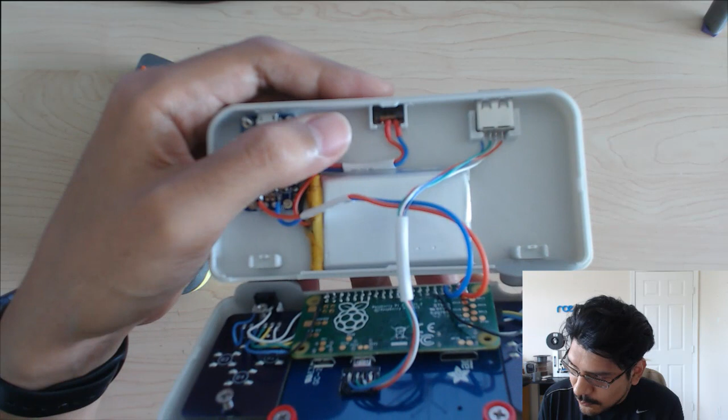So this is the PiGRRL Zero case, and here I only expose the switch, just the little switch piece, not the entire body of the switch, but the little actuator thing. The cool thing about it is that it's designed in a way where you cannot push this in. There's a little wall behind the component that prevents this thing from going in. You can see it here, there's just a little wall that keeps the switch in place.

So when you turn it on, you can't push it in because that little wall is holding it in place. And there's enough room to expose these wires and the little leads. So a really simple, straightforward thing to do, but I wanted to apply that to the PiGRRL 2 case. So that's what we're going to do.

We're going to take a look at CAD, and we're going to update the old case, not the old case, but just bring it back to the current. I'm also going to do a couple other different things too, which we'll talk about in a minute, but we'll see with time if we'll be able to get to it. So let's go ahead and take a look at some CAD.

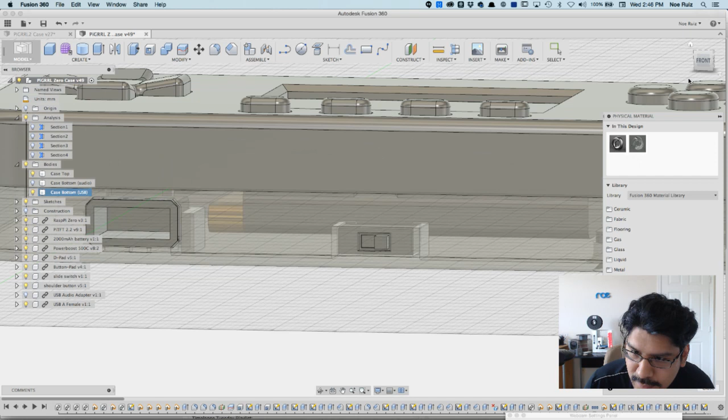Here we are in Fusion. Both enclosures were designed in Fusion. Let's take a look at the PiGRRL Zero first, just to get the look of it here. This is the case where the little switch is exposed, and if I do a quick material update, I can make this look like glass so you can see through the enclosure, so you can see that's where the case is. It's not fully exposed, the only thing that's exposed is the little actuator.

If I take the top off, if I had the top, see if I can get in there so you can see the rest of the geometry. I'll hide all the components real quick so you guys can see, just right click on all of them and shift select so I can hide everything. There we go. So that wall that I was talking about that keeps the switch in, this is pretty much the wall, just a couple of faces here, and then these little side walls also keep it from coming in. But there's a little bit of gap.

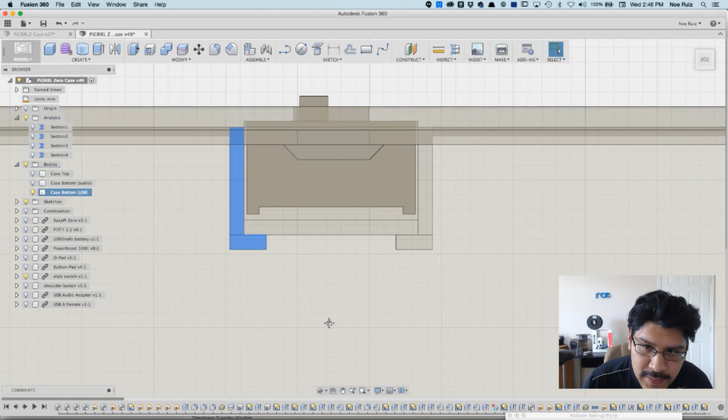So the gap there is in place because if this wall was fully extruded upwards, I wouldn't be able to get the actual slide switch in there. So if you insert it at an angle, which you kind of have to do, there's just enough leeway for the switch to kind of snap fit in there. So that's sort of how that works.

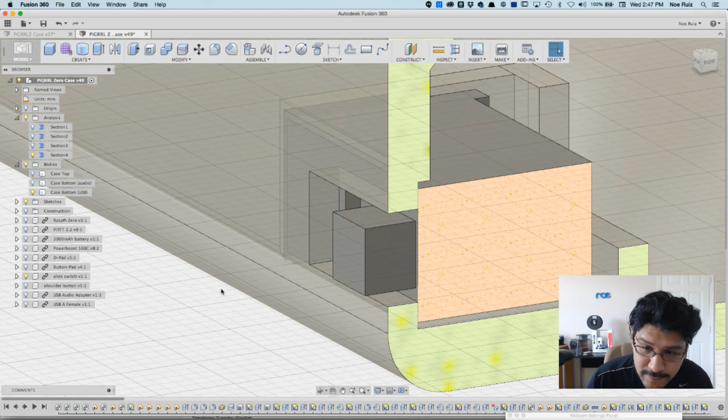And if we do a section analysis on it, we can see how it's right up against the wall of the enclosure here, and this is actually the opening of it. The whole case itself is about 1.5 millimeters thick, or 1.4, but it's been pushed in a little bit, so you can see that little overhang there. It's been pushed in by 1 millimeter, or 0.4 millimeters, so it makes this wall about 1 millimeter thick. So it's really right up against there.

And I could add a chamfer here, but I haven't done that, and I've already printed it out. The printer seems to be okay with it because it's not that big of a problem — it's not a large overhang.

So let me hide the slide switch real quick so you can see how it sort of gets nested into the face of it. And that's pretty much it.

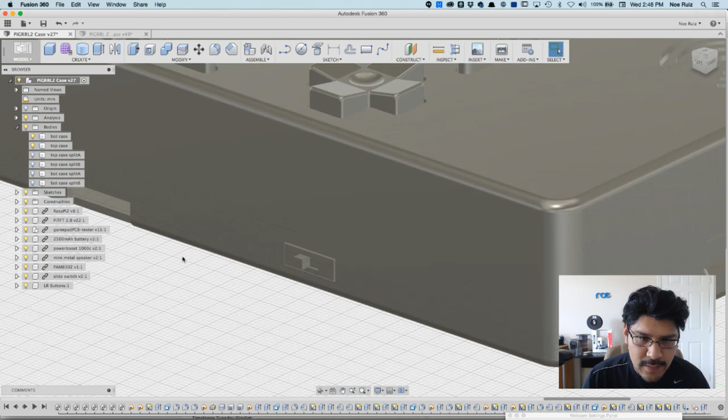So to apply this, you kind of have to draw some new things, but I can leverage some of the sketches I've already done, because all the cuts and extrudes here are actually derived from sketches. So the cool thing about Fusion is you can update sketches and modify existing features, because I have a timeline here at the bottom. Every one of these things at the bottom are features.

So let me hide the switch real quick, or let me do the same thing where I can click and hold down shift to show and hide multiple items, and then I'll hide the top case. All right, so now all that's left, let me hide that one too. Now what's left is the switch in the case.

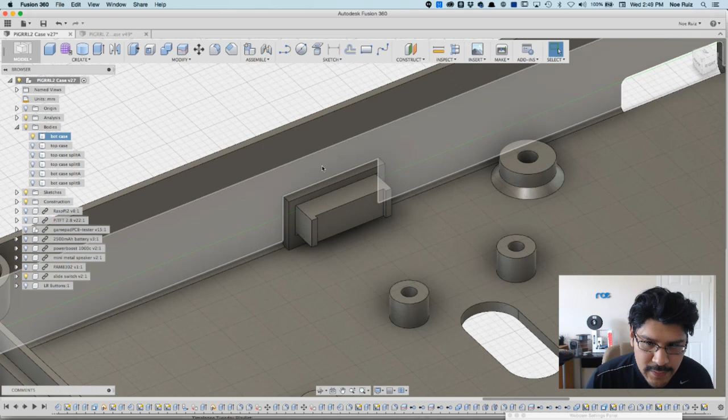So you can see the case here for the PiGRRL 2. There is not much there — there's no clips, nothing really preventing the switch from being pushed inside the case, which is what the problem is. So we'll update that and clean up a couple of things here.

So if I hide the switch and click on this face here, it'll highlight something in the timeline. These little 3 bars here, those icons indicate, hey, this is where that spot is. So if I double click on this, you can edit the feature. So the distance, it's actually a 2-sided direction extrude, and the operation is join.

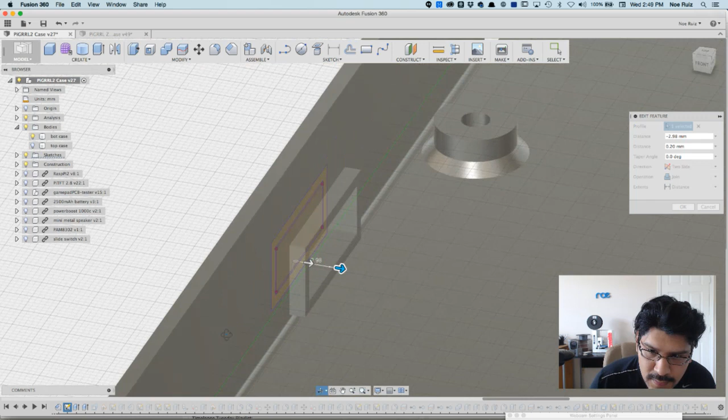And that's actually creating this little lip here, which I don't actually need. So I'm going to delete that — this one right here.

Actually, if you don't want to delete, you could suppress it. So if you right click on a feature, you can hit suppress feature, and I'll just disable it so that it doesn't affect it.

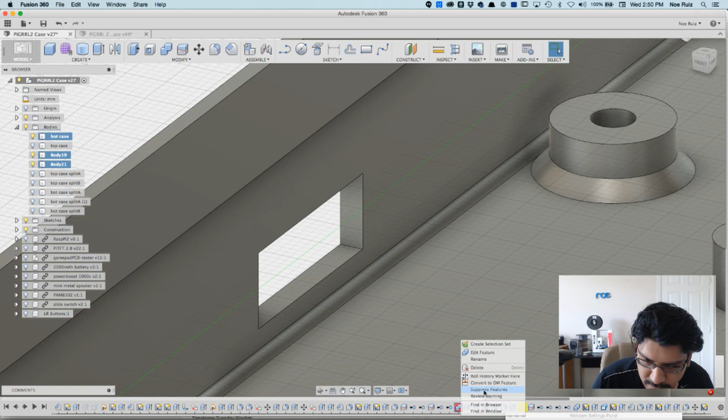And then we get a couple warnings here. It's saying, hey, there are a couple things that are dependent on that feature. So now these other features are like, hey, this isn't working. So there's a chamfer, for example, so I can suppress or delete those if I want. I'll just suppress them for now and see whether or not I want to delete them. There's a combine, which I need to suppress — I'm not even sure what it's doing, but I know it has to do something with that geometry, so that's why I'm suppressing it. And I think that's about it.

So I just have this big hole now. If we bring the switch back, you can see it's still there.

Okay, so the next thing I'm going to do, now that I got rid of that specific feature, let me hide this switch again, click on this face, one of these faces again, and I should see something in my timeline that tells me — so this right here, let me double click on that, see what it's doing. Okay, so this is where it's actually making that hole.

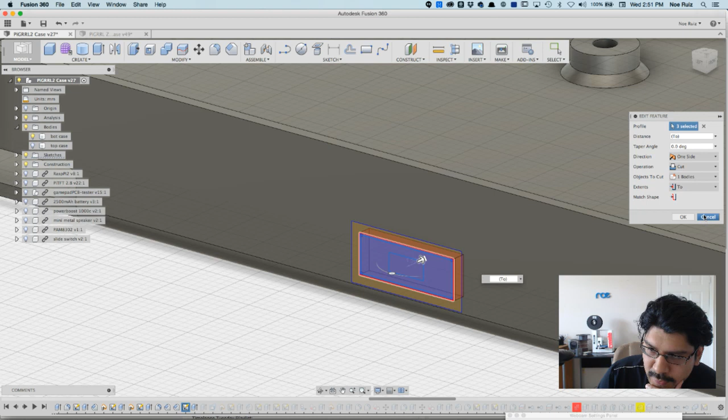So what I want to do is leverage this sketch. This is a sketch that I drew when I imported all the components — I projected sketches of those components so I can create those openings for the components on the case itself. So what I'll do is go into my sketches folder right here. And a really important thing to do, guys: if you draw a lot of sketches, be sure to name them.

I know I'm bad about not naming things sometimes, but with this project, as I got more features and sketches, I knew it was important to name them. So I can come in here and know exactly which one is which. Well, I can pretend to know. This one is called switch hole. I'll open it here and show it by clicking the little light bulb icon, kind of like on and off.

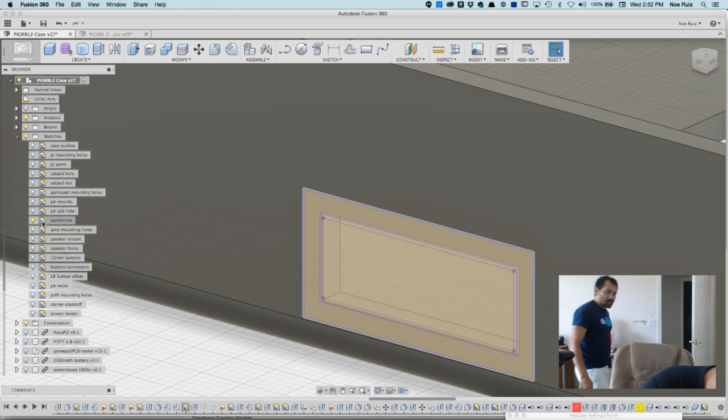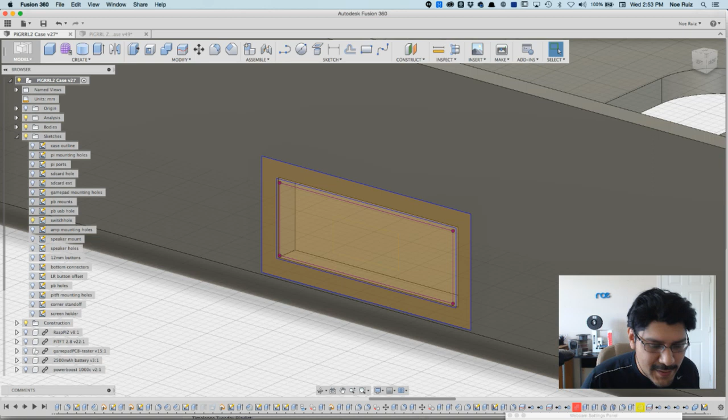So what I have here is that switch hole, and if I double click on that sketch, I can see I'm in the environment for editing it, since you can't edit it outside of the sketch environment. What I'll do now is reveal it, show the switch again, and this is where I'll draw the hole for the actual actuator, the little switch dolly. This whole thing is the switch body, and I'll call this the actuator. So what I could do is project a sketch of this specific face here.

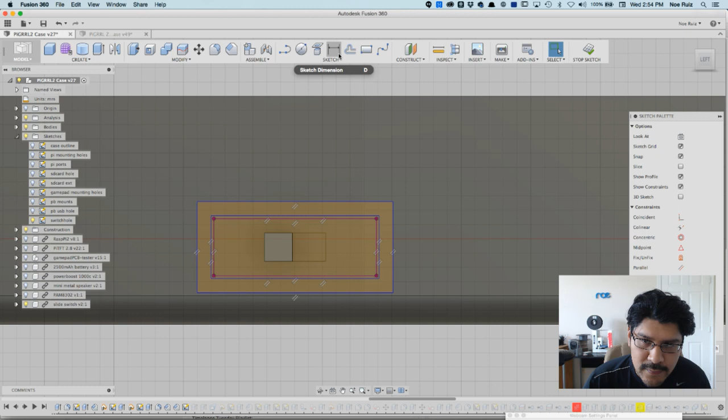What I think we can do is go over to sketch, click on project include, and P. If you click on P on your keyboard, that's the little shortcut. Right now it's a little tricky, so I should probably hide all the bodies. Now I have a bit more ability to click on the right face I want. It looks like it's not selecting the specific face I want, so I might have to just draw on top of it. Let me click on a couple things here.

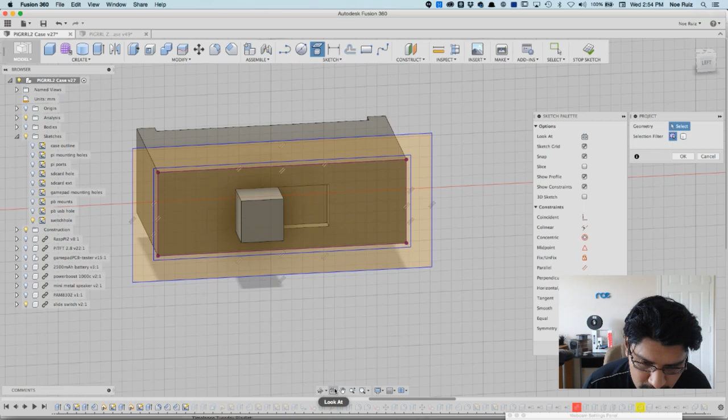By orbiting it's acting all weird, so one thing to fix that, I think, is to click on 'look at.' That lets you look at a specific thing, so now when I revolve around it, it's good there. So that's look at, you click on a face and it'll revolve around that face, because the default is kind of annoying. Now I don't think I can still project anything. I can't select that, I can't select this. Let me see if I can go inside this switch. Go to bodies - nope, it's just one body.

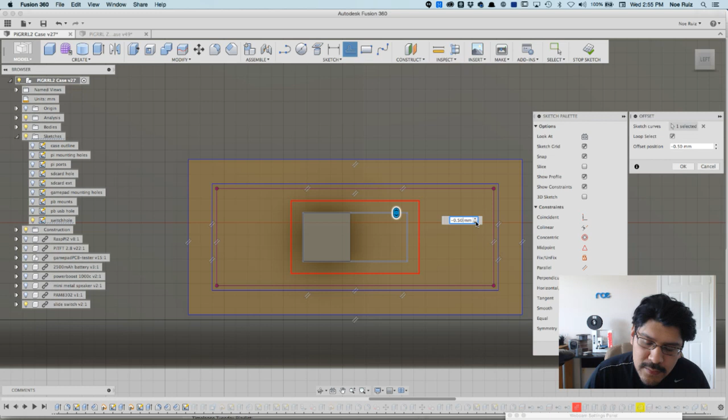So I might want to not project it, but just draw on top of it instead. I really want to be able to see that. I can sort of see something there, I can sort of see a project - yeah, I guess it's already projected. You see how I can select that? If I click on outline, I wonder if I can select it. Yeah, I can select that guy, and that will offset it. What I want is pretty close - the offset position is going to be negative 0.5 millimeters, half a millimeter. I'll hit OK, and that's basically exactly how I've done this guy in PiGRRL Zero.

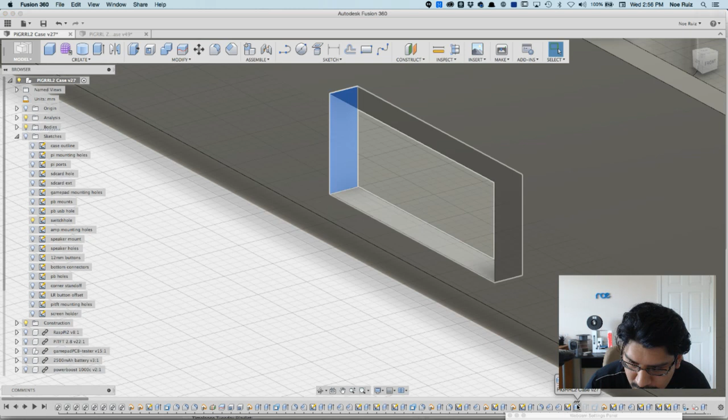I'll hit stop sketch, since that's all the modifications I want to make, and that will save the feature. Now it goes back to this thing. So what I'll do now is hide this real quick, the little slide switch component, and I still have it open here in the sketches panel. I already forgot which feature in the timeline it is, so I'll select one of these faces - I'll probably have to hide the sketches real quick. And there it is, that's the guy, there's the culprit. I have it highlighted, and I'll double click on it.

I'm just going to edit this existing thing. So when I double click on that feature, I can see the profile here - this is all the little sketches associated with that extrude. So I'm going to click X, then I'll bring back the sketches, and then I'll click on these two guys.

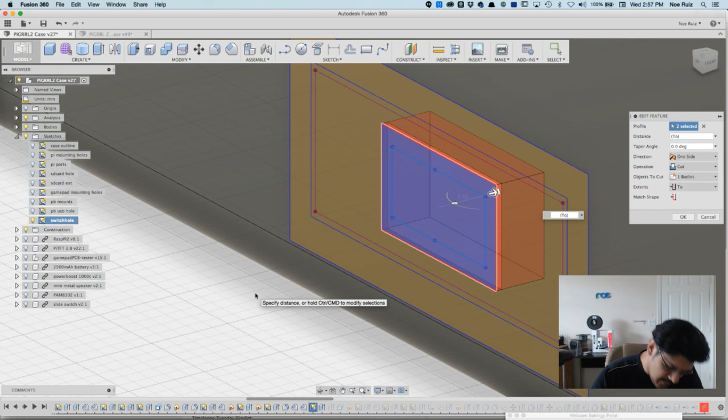Did I click on that? Let me hold down Command or Control on a PC to select multiple profiles or features in the sketch. If I toggle that key, it'll show you what it's doing. So that's pretty much what I want, so I'll hit OK.

Fusion's going to think about what it's doing, and then it'll do it. Now I have my updated hole. So again, I'll reveal the switch, and you can see it's already, because it's in that position, coming outside the case.

So I need to update the switch positioning of the switch. So the next thing I need to do is figure out where in the timeline I made a snapshot

of the components. When you're importing and dealing with components, as you move them around, you have the option to save the position as a state in your timeline. They're indicated like this - here's one, here's another one. I've done it quite a few different times, so I have to figure out where in the timeline I last updated those.

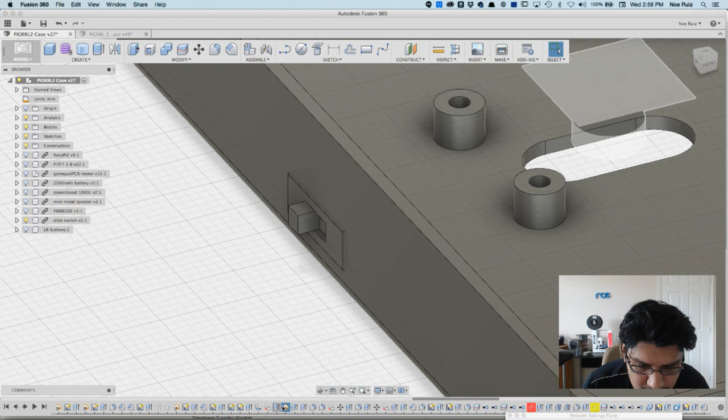So I'll probably just go to the most recent one, the one closest to the end of the timeline, because that's where I left off. The end being over here, far to the right, and the beginning all the way to the left. So just by looking at it, I'm thinking it's this guy over here, this little guy there.

What I'll do next is double click on that, and it'll change a couple of things here. Now I have these two new icons at the top - it says finish capture and cancel position. When I move any of the components, it'll let me finish the capture, which will accept the position edit, and depending on how I moved it, it may update some sketches, like if anything was projected from that component.

So what I want to do is move it in a way where it's kind of similar to the PiGRRL Zero. You can see here it's kind of floating, a little floating there. There's plenty of room here, and I don't want that, because if I look at the PiGRRL Zero, it's not really floating at all - it's flat with the surface of the bottom of the enclosure.

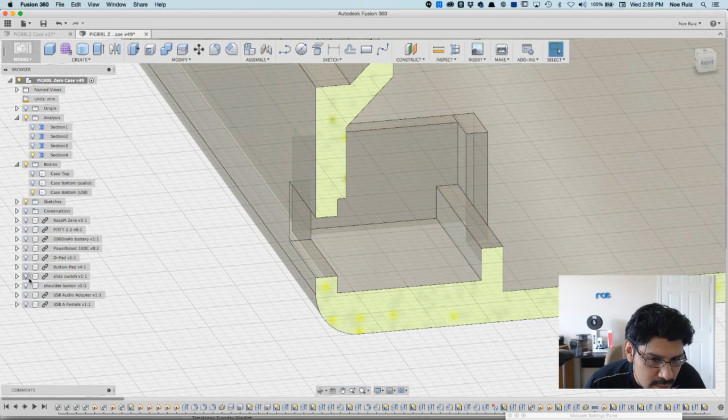So let me bring that back. Yeah, you can see it's a little bit floating, tiny bit. Looks like there's a wall there and stuff. So I could probably just extrude a little platform for it so that there's something for it to rest on.

So I might move it down a little bit just so it's not so floaty up there. And looking at it, there's no problem with it being lower to the enclosure, because there's nothing going underneath it. I'm just thinking out loud so you guys can hear the process of like, all right, well,

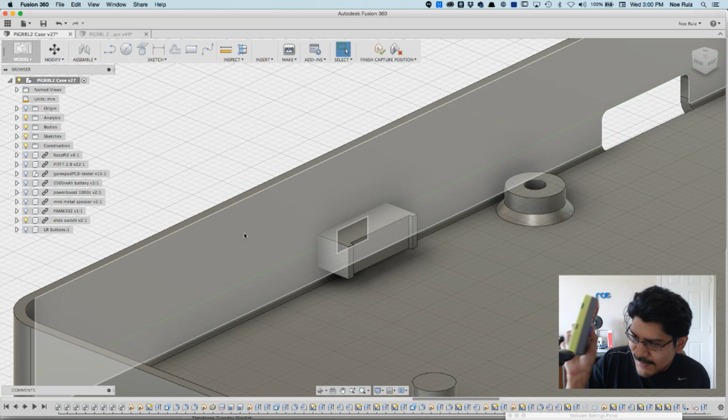I'm here, so where's a good spot for it? It's in a good spot where my fingers don't get in the way of it, and because it's recessed into the case... oh man, I'm starting to lose it in there. I'm just looking at it here, making sure it's in a good spot and whatnot.

So what I'll do is hit the modify button over here, move, and then select this guy here. Now I can move it down a bit. My hopes are that I'll be able to hit finish capture, and then the extrude that we did will update. So what I need to do is actually push it back a little bit this way.

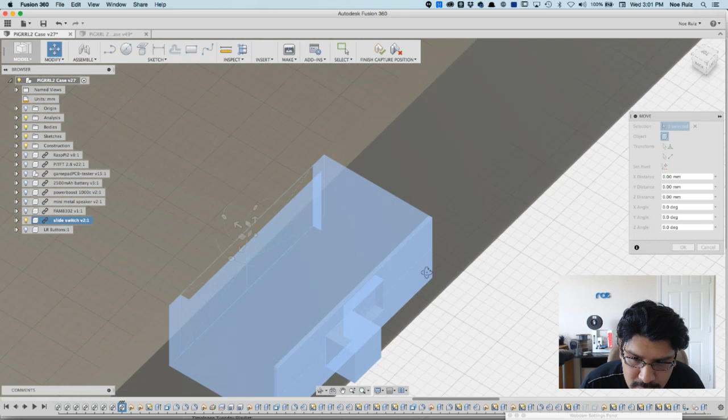So I want to be as flush with the case as I can, but I'm not sure how exact I can get it. There's a button up here - this is align, and you can align something to that, but I'm not sure if I'll be able to align it perfectly where I want. So for now, I'm just going to try to move it in sub-millimeters here.

Let's see if I can. So like 0.2 is right there, that's pretty flush with it. But I need to push it back 1 millimeter, so I'm going to just type in 1 here in the little Y distance floaty box. And then that will give me a good spot here, so now I'm 1 millimeter from that.

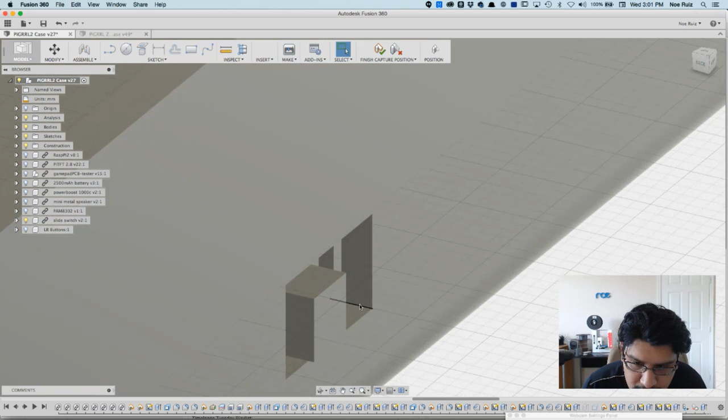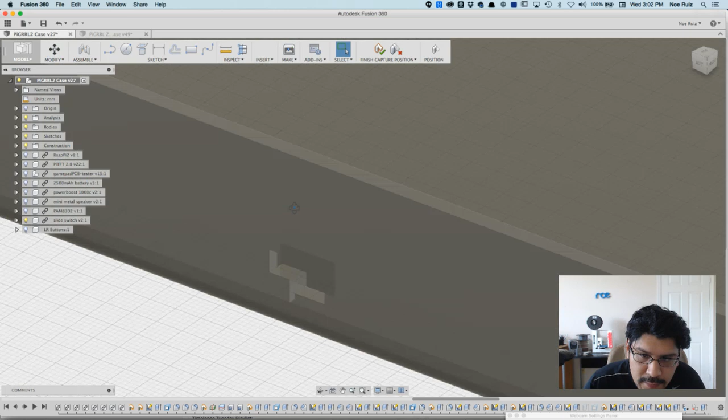So let's go ahead and hit - oh yeah, I wanted to move it down a little bit too, right? So let's just hit the move again. When you hit the move button, you have a couple different places to snap your manipulator to, so depending on where you want to move it, you have the control to do that. I'm just gonna move it down by 1 millimeter so I have a little bit more clearance and stuff.

I'll hit OK. And you can see now that I'm not aligned with the thing anymore. So I'm gonna hit finish capture, and hopefully the stuff will update. It might not, because I think some of the edits, the extrude for example, was done before the position. So what I should have done is modify that position of the component right before any of that stuff happened - that's why none of these things got updated.

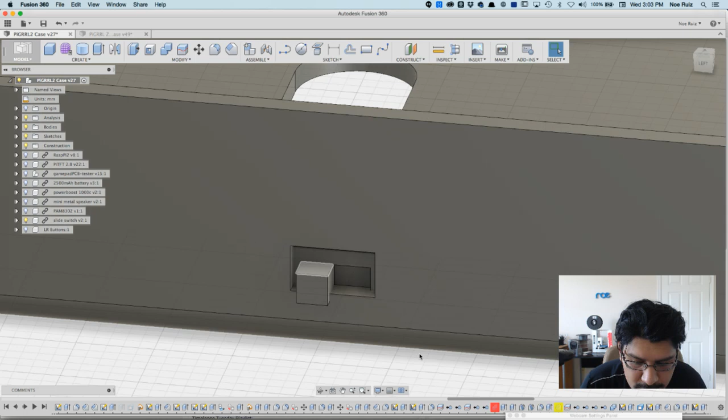So I need to kind of do that stuff again, but I need to find this guy - find it here, and let's see if I can. So it's right here, this is the thing here. So this right here, I should have modified this position. And you can of course move things around, but I'm fearful that something might - probably not though.

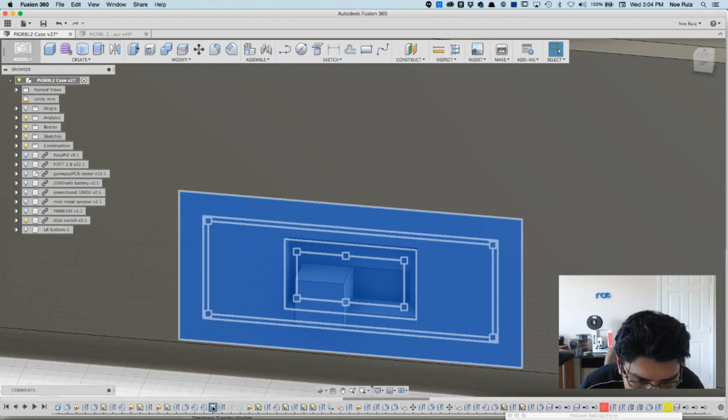Let's see, let's do this again. I can probably just move this feature past that. So I'm going to grab these two and then move it past this position 9, I guess. So let's see if we can do that. I'm going to click and then just drag it. And it's not letting me. So that would have been nice and easy, but it's not - it doesn't let me push it forward.

So what I have to do is - let me see, okay, so it's these guys. I'll have to modify this guy, so I'm gonna double click on this, and then you can see that's positioned over there. So I'm basically gonna redo the stuff here, but I remembered what I did. So what I can do is hit the modify, click on that - we pushed it back by 1.2 millimeters, and then we moved it down by 1 millimeter.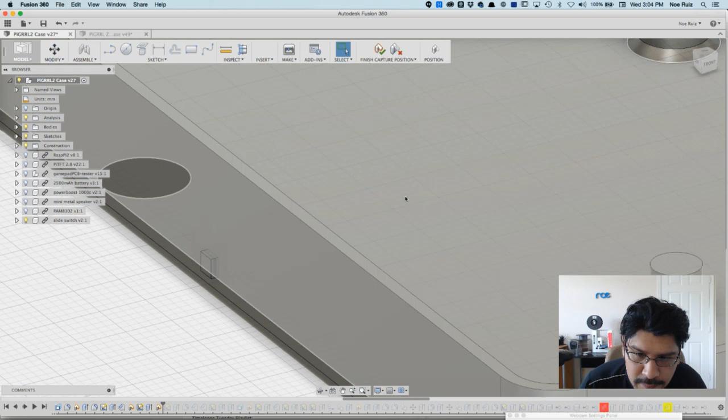This is all arbitrary, I mean it's up to you however you want to modify, but I think this is going to be a good update to it. And then I'll hit finish capture - hopefully the extrudes and everything get follow through that update.

And it really didn't - now I don't see any extrudes. Let's see where I am in the timeline. Am I just not there? No, I'm far back over there. So now I don't have those extrudes that I did. This is a good problem here because I'm not sure why some of these things didn't get updated.

And now I think I might be lost here a little bit. I think I could do Control Z, but I'm not too sure. These are some other features from before that were suppressed, and these are some other ones here. So let's see - let me hide this real quick. Yeah, it's gone.

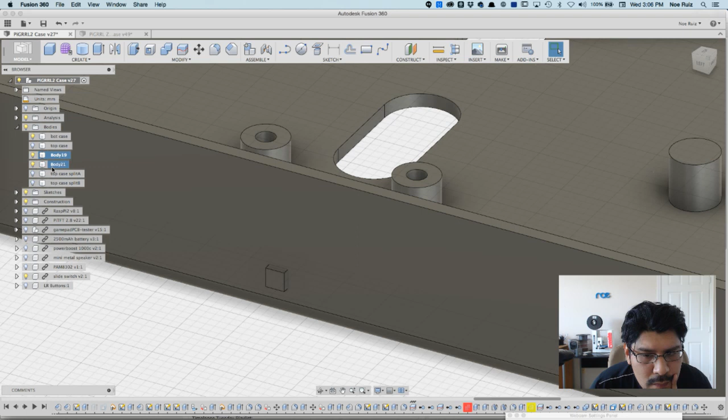What are these? Oh, okay, so a couple different things are happening here. I think these are those standoffs that didn't get merged, but we'll deal with that in a minute here. I really got to figure out why some of our features just sort of disappeared here. I keep thinking it's these, but it kind of looks like it - it might be these guys here. I'm not sure why they're suppressed. Let me unsuppress them, see what happens.

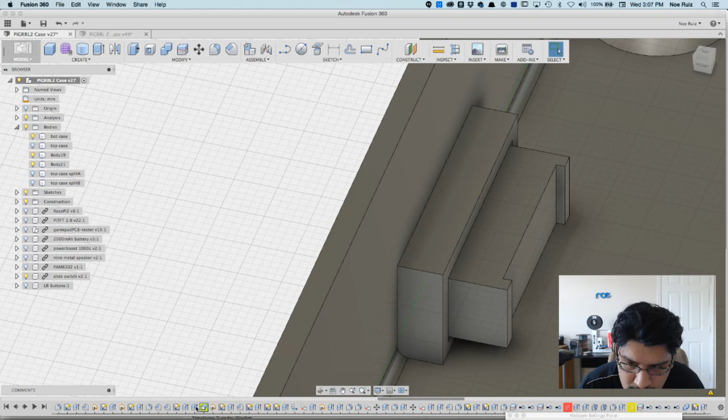Wow, so those were the other things that I didn't really want. Let me re-suppress that. So we got something there. So it is there, but...

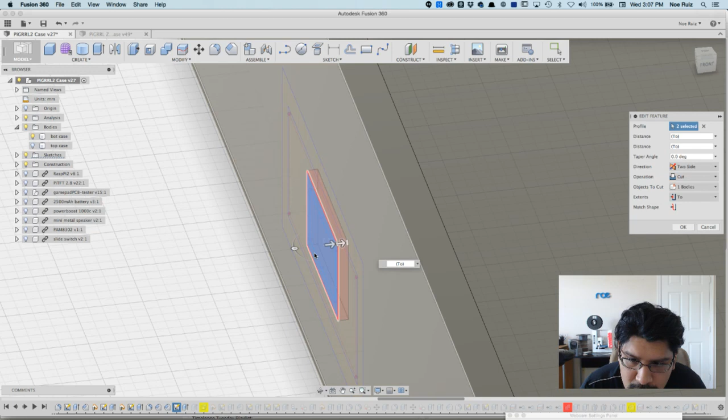Ah, I see, so it happened but it didn't update this side for whatever strange reason. Let me click on this guy. I just got confused, it felt like it didn't go there. So what I'll do is hit two side, bring this one out, and now that should do something here. So I'll hit OK. I think the positioning did update.

Oh man, I messed up again. I need to push it forward too. This guy needs to get pushed forward so it cuts through the whole thing. I would use a distance too, but because of where the component is, the sketch followed it.

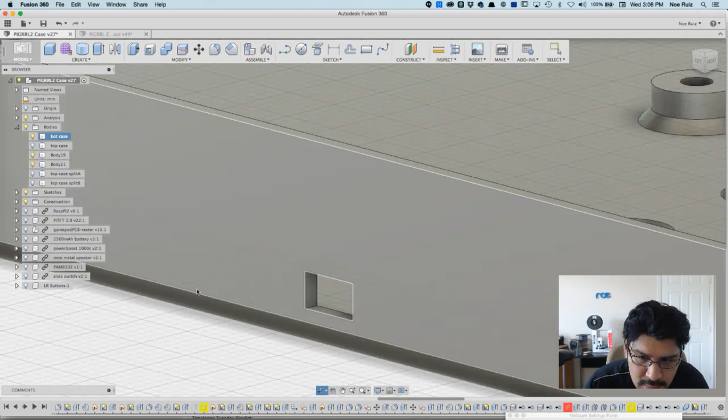So let me see, let me make sure that... yeah, it is right. So you can see here now that the new position of the slide switch has been updated, everything has been updated with it, and that includes the sketch. So the sketch is there, and I think that's good there.

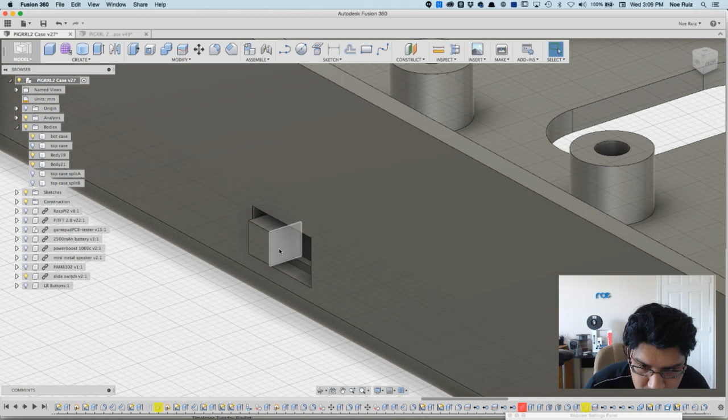Now the next thing I want to do is, you can see that I need to cut away some material here. So what I'm going to do is bring my timeline head, my positioning in the timeline, which is all the way over here. I'm actually going to bring it back to this spot here because I want to start modifying features in that spot so it's all in the same area.

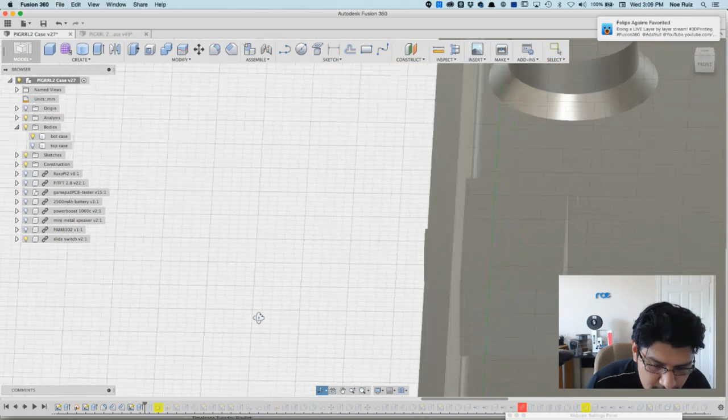So I wonder if I can, like, say, roll marker here. I think that'll bring it there. Awesome, I've never used that feature, but it's there and it seems to be okay. So now what I can do is start modifying new features, applying new features to this spot in time.

So what I'll do is I'll hide my body here, my case body, it's in the bodies folder, and I'll bring back the slide switch hole. You can see not all the sketches are there because at this point in time none of those sketches have been created yet. So you have to think about things like that. A little confusing, but hopefully you folks can follow along with it.

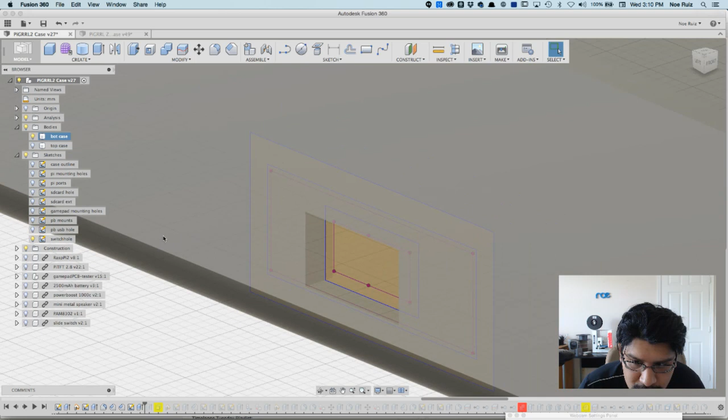So the next thing I'm going to do is hide the slide switch here, and I will bring back the bottom case because that's what we're working on. You can see it's inside there. So what I need to do is hide the body again, and these are basically the things I want to extrude out—these three here.

I'm going to hit E on my keyboard since I have them selected, and I'm going to start pulling this out like that. And now it's creating a new body, and that's because there's nothing here to interact with. So Fusion does its best job to say, hey, maybe you want a new body. But as soon as I make a body, it thinks that I want to cut, and that's basically what I want. So I'll hit OK, and that creates a new feature here at this point in time.

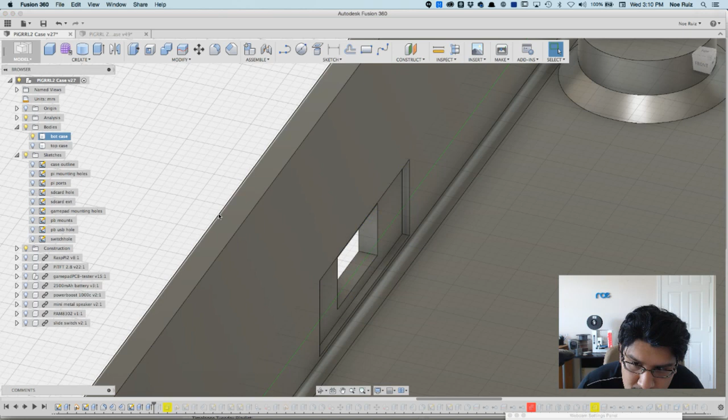I'll hide the sketch. And now hopefully this is 1 millimeter. It might not be. It's 1.02, which is pretty damn close, but whatever.

So if I bring back the switch, you can see now I have enough area for the switch to sort of feed inside of. So it's in there now. So all that material is cut away.

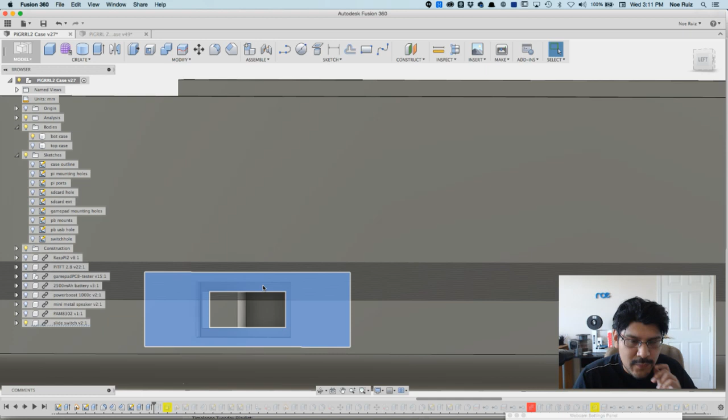And I also have a small offset too, about a 0.5 offset, so that the switch has a teeny bit of wiggle room to go in there. And this offset, of course, was 0.5, which is half a millimeter, which gives me a lot of leeway. And when you look at it, it actually looks a lot less. So it's always good to have a little bit more leeway, especially if you don't want something that's so sort of friction snap fit.

All right, so that's pretty much a good spot, good position. Updated that. Now I could probably go forward in time and start doing things, but I'm going to stay in this area, stay in this point in time, and start applying new things. So I actually need to make a new sketch so I can make this feature stuff.

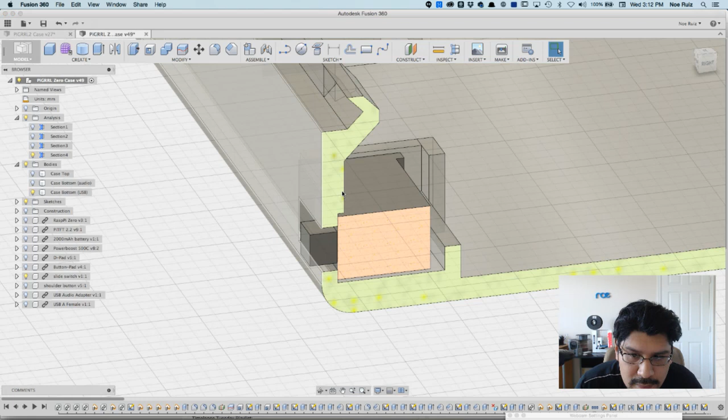Let me hide this so I can reference my drawing anyway. So if we look at, let me hide this—this is the PiGRRL Zero case, by the way, because you can see here in the tab, PiGRRL Zero. I have a sketch for it, and I think it's called switch holder. Yeah, switch holder is this guy. A little bit different than what I envisioned.

Switch holder, do I have any other switch things? I don't see anything else. Switch cut, that's the cutter.

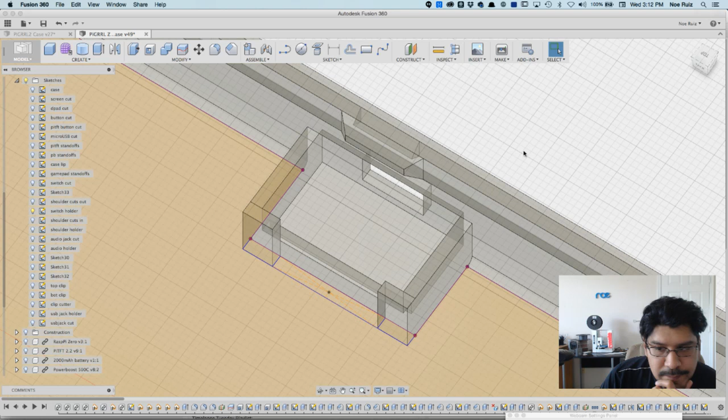I'm trying to figure out how did I make the sides. Might be clip holder? No, that's something else. Uh-oh, I'm a victim of not naming these, so I don't know what the heck they are. Shoulder holder, shoulder cuts, switch holder, what's sketch? Ah, so maybe it's this one. Sketch 33.

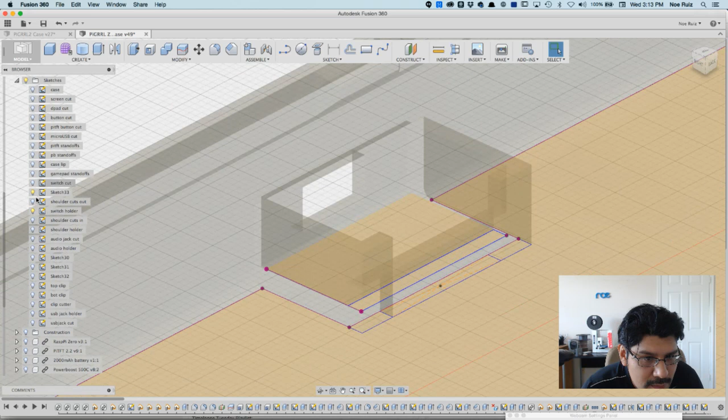These are shoulder cutouts. It's probably for the shoulder buttons. So something here made this. It could have been... I think this is for like the platform. This one's for like the...

I gotta make this a little bit simpler. Like I want to try to do all this with one sketch instead of making like 4, because I was experimenting with it while doing this, so this can be cleaned up and simplified a little bit. So we'll try to do that here when I draw a new sketch on top of it.

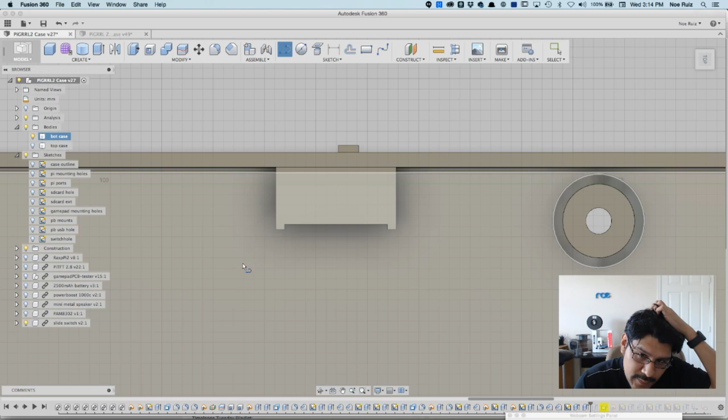So I'll make a new sketch, and you can do that by just playing with any of these sketch tools. You got a lot of different tools. So I'm going to start with the line tool, and I'm going to sketch right on top of this face here, which is the bottom inside of the case, and it'll project it. So it projected that whole bottom case, and I'm just going to start drawing from the top view down.

So the thickness of this thing is, I can reference this guy at least. I think it's like 1 millimeter thick, 1 millimeter all the way around. That too is 1 millimeter. The height of it is pretty much flush with the switch. Yeah.

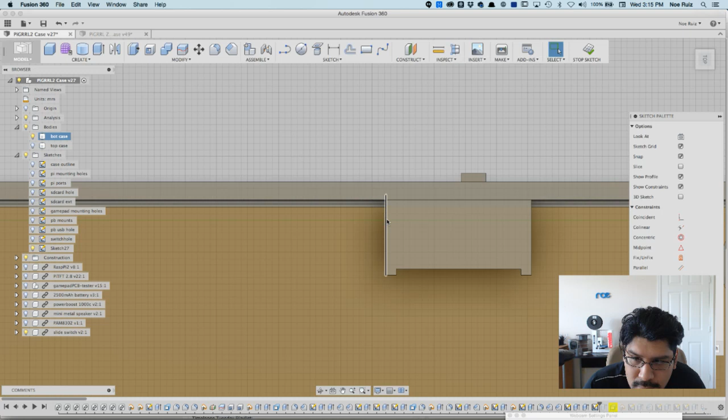So that's okay. So I will start drawing out a line here. And you can see when you roll over stuff, it gives you it kind of locks to that. You know, I wonder if I have a gap here, a little bit of a clearance gap. I do. Probably 0.2 millimeters or so.

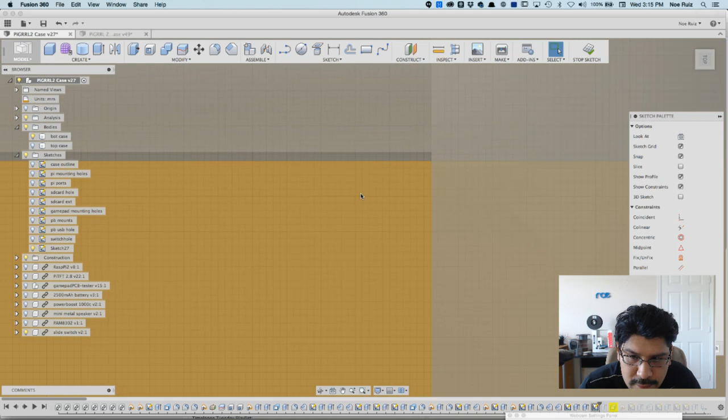So one cool thing is when you zoom all the way in, you can get these grid lines, and that gives you a sort of a helping eye of how far away something is. So I think as the closer you go is like 0.01, and then over here is like 0.1 of a millimeter. So I think we can, so it's like 1, 2, I think we can do that.

And then I'm just drawing, but what I can do is add dimensions to this thing, so I can know measurements or anything like that, so I know exactly where I am. And it's snapping to the grid, so that's one nice thing.

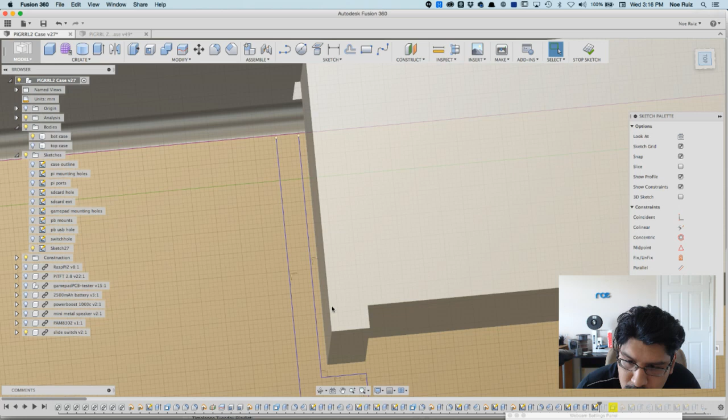So from here I can just see if that really is a millimeter. It's actually 0.6. So I think I need to push it down that much. Let's see if I can do a dimension from here to here. It's already 1 millimeter. Alright, that's good.

So then I can say, I'm hitting D on my keyboard to bring up this sketch dimension tool. So I'm going to say like here to here. Oops. I need to select everything here. Click away. I get back in here. So let's say I want to make a distance of these guys instead of 0.5, I want 1. And it pushes it back that way. So that's cool, I just needed to do that.

I don't really need to keep it there. And then how far it goes in is another sort of, I'm not sure. And 14? Nah, that's not right. Let me click on this guy here. So 2.55, this is sort of arbitrary. So as long as it's more than 2 millimeters or so.

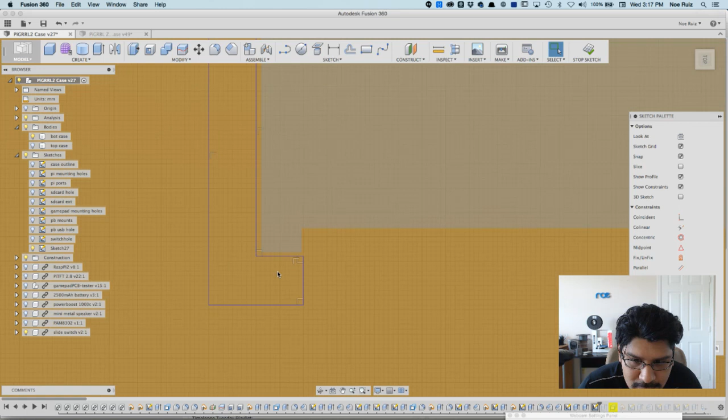So I think we can do a dimension here. Oh, it's already 2, so I can put 2.5. Ah, and it pushed it back that way. So that's not what I want. I want from here to here, 2.5. Still pushing it.

So another option I could do is I can lock this here. Lock it in place by using the sketch palette tools. There's a little lock fix. So that green, it went from blue to green, so that indicates, hey, you're locked in place. So now only this will move when I do a sketch dimension.

So from here to here, 2.5. There you go. It's a little bit of extra work to make it happen. And I'll unlock it in case I want to move it again.

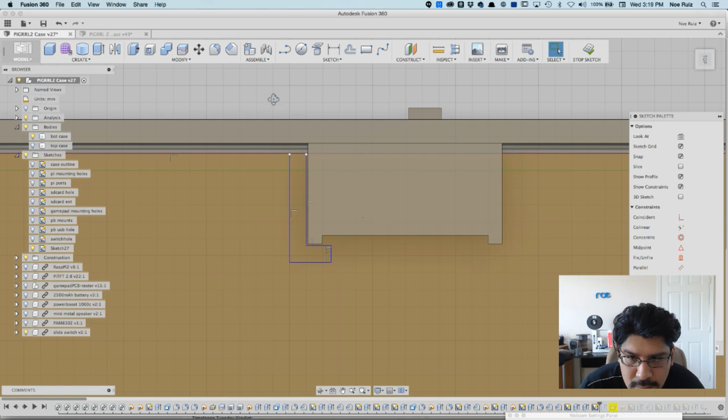So we're looking like we're getting there. At this point I need to move this guy somewhere like over there so that it goes past the face here, the enclosure.

Just checking my time here. I wanted to keep this under half an hour, but it's like, no, I think it's an hour. Something simple, it should take half an hour. Nope, it'll take an hour.

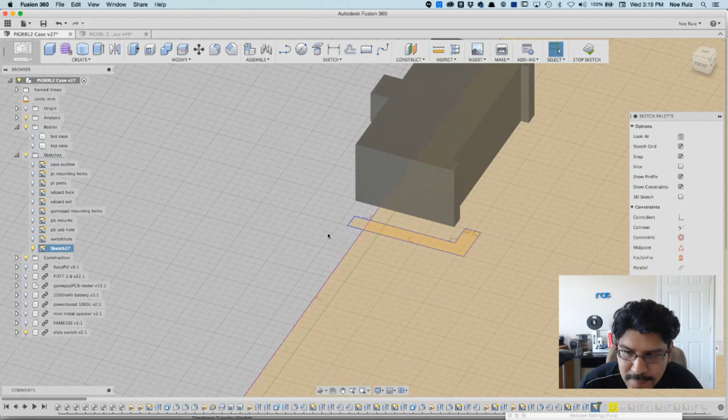And then I'll close this off here. So now it's a feature that I can extrude from. And what I could probably do is find the middle of this component, and then create a mirror so I don't have to redraw the thing again.

Hello? Okay, just make sure my audio is okay.

So what I did was I just rolled over this component, and that little X, or the little triangle icon, indicated that's the middle of the icon. So what I can do is use this as a construction line to make a mirror. So I'll do that. There's a little weird funkiness over here. There you go, that's better.

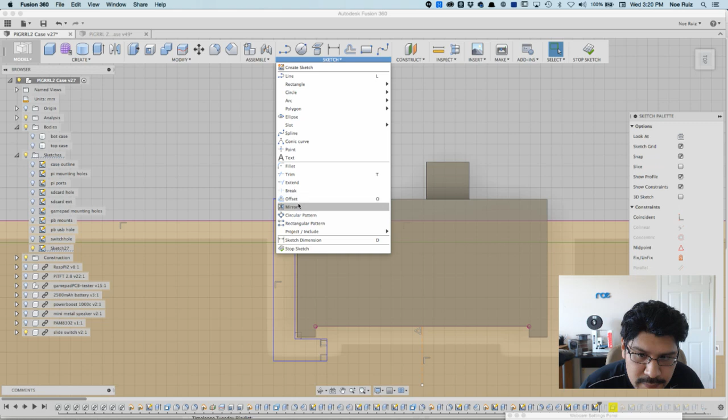Alright, everything looks square to me. So now I can do a mirror. Under sketch there's a mirror feature, and it'll ask you to select the lines you want to mirror. So I'll just select these lines here. How many are there? Like 7 of them. And then I'll change the select here from mirror line to be that thing there, and it'll do a perfect mirror. So there's my mirror.

Alright, so at this point I can either hit OK, stop sketch, and extrude this stuff out, but I still need to make this one feature here, which is this, oh man, let me hide all this stuff, which is this guy here. This is kind of driving me nuts here. Hold on, I'm gonna, whoa, not sure what happened there.

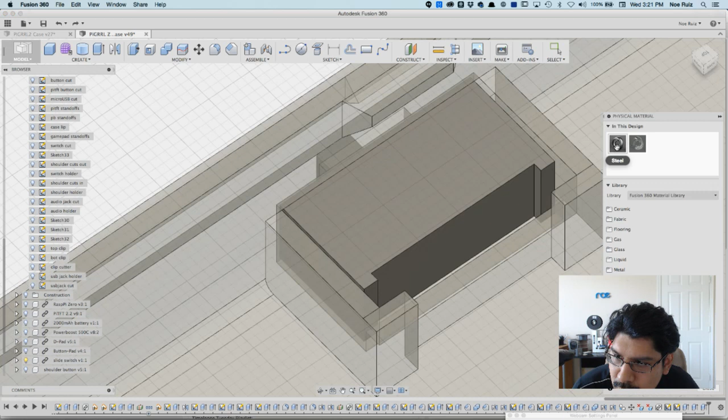It's physical materials, and then make this back into steel so it's not all weird and transparent looking. So it looks like, come on, update. So it looks like there's a little bit of a gap here too.

And this is most likely 1 millimeter thick. Pretty sure it is, I'm not even gonna bother with it. I know it is. And let's see if I can redo this here. Ah, looks like there's a little bit of a difference here.

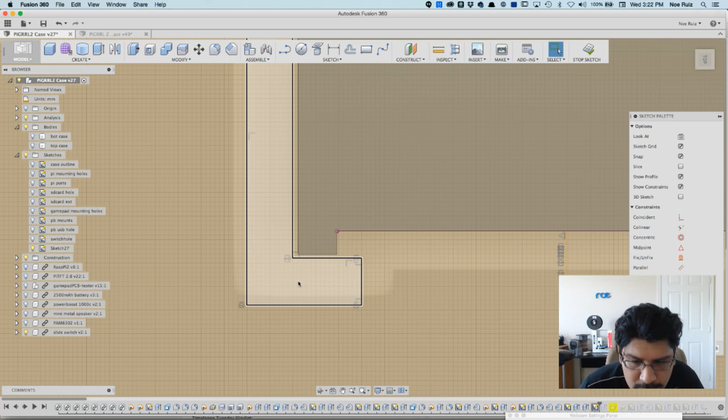Looks like I might need to push this back a little bit more. It's fine, so I can just work with this guy and this will get updated. So for example, if I wanted to push this out some, it should update there. Let's see, I'm just trying in my head to think of the best way to push this out by another millimeter or so, because that's what it looks like is happening here.

Because I remember the reason there's a little bit of a gap is so that the switch can actually fit inside there, because the actuator has to get inserted at an angle, so there needs to be enough room in this clip area, the holder, so it can get fitted in there.

What I'll do is make a sketch for this guy, and that's gonna constrain the size of this sketch to always be 1 millimeter. So I'm hoping if I push this out, it's doing that. Cool.

So at this point I can just kind of count these little squares and make sure there's enough room. So what I'll do now is draw out my, I'll probably just use the rectangle tool to make that. So it needs to be 1 millimeter.

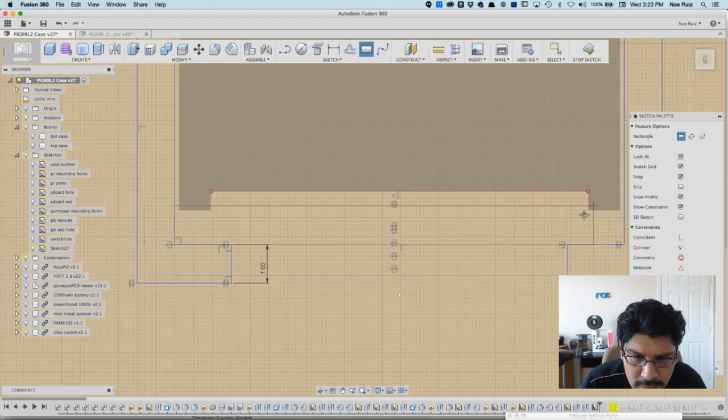And then I lock that in, and right there, that's some weird number. It's okay that it's a weird number, because the switch is precise since I measured it with calipers, so it's going to be some weird number anyway.

So okay, I got that sort of thing there. I do need to push back a little bit more, so just push it down like that, and that looks about right. Looks like there's enough, maybe just a teeny bit more. How's that? Looks better.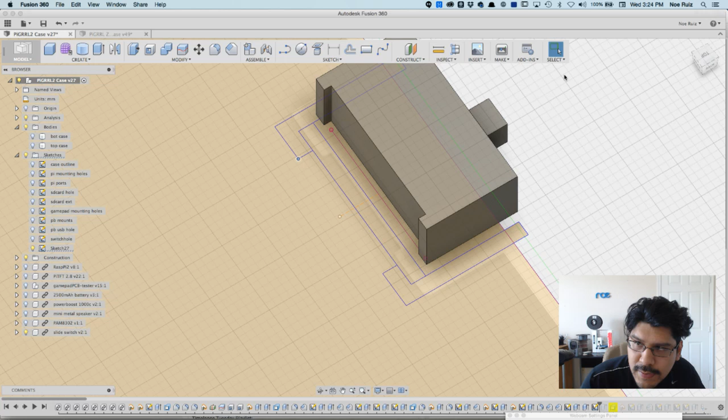Okay, so I think that's gonna do it for the sketch. I just hit stop sketch. So what I can do now is extrude this stuff here.

I will bring back the bottom case, hit extrude, and then I wonder if I could just hit extends to, and then say to this area. Yeah, cool, so that'll just make it exactly to that position here. And it's dynamic, so whenever I move it, it'll update because the extent is set to To. And then that looks good.

Now I'll reference PiGRRL 2 again because I'm not sure. Let's see how big this wall is. It is about 2 millimeters. All right, so I'll do the same.

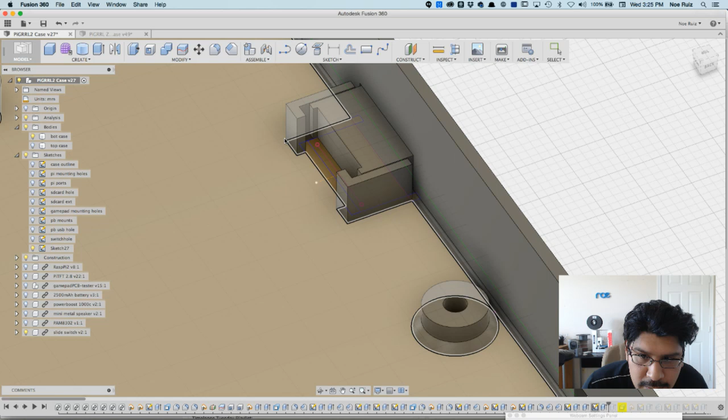Bring back this sketch here. I'm going to name that sketch in a second so I know what it is. And I'm just going to put 2. And then I'll hit operations join so that it joins it to the whole enclosure.

And I can see I got a little bit of a problem here. There's a little gap there, so I need to modify the... where am I? There it is, I need to modify this guy.

So I need to hide everything, and then hold down command to add these guys here. So that will make it extend to the bottom case. Wrong part, there you go.

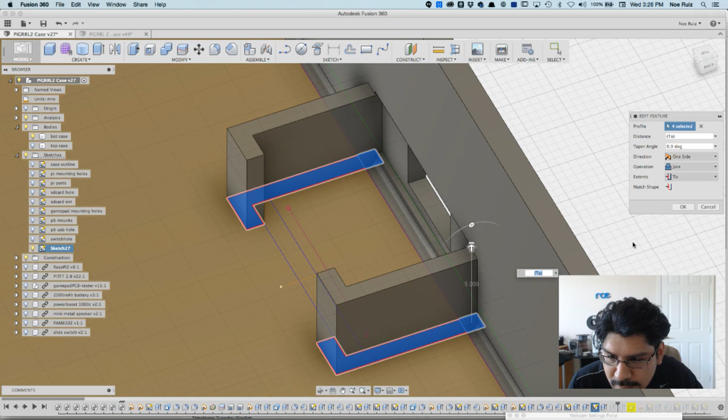So you can see here now the gap has been updated. So now it's flush with the wall. And I got a little bit of a problem again where there's just a little bit of an intersection problem here.

So what I can do is I can probably just move this guy over right there, and it kind of cuts through the whole entire thing. So I got yet another sort of bad thing here.

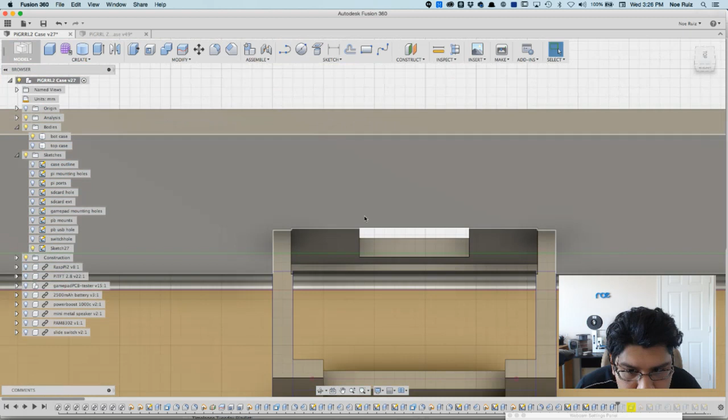So what I probably need is to just update the sketch, because I don't see that problem here. Let me hide this sketch here. It's actually pretty flush with it. Yeah, you can see that's supposed to be flush with it. That's a little bit weird. Let me look back at it.

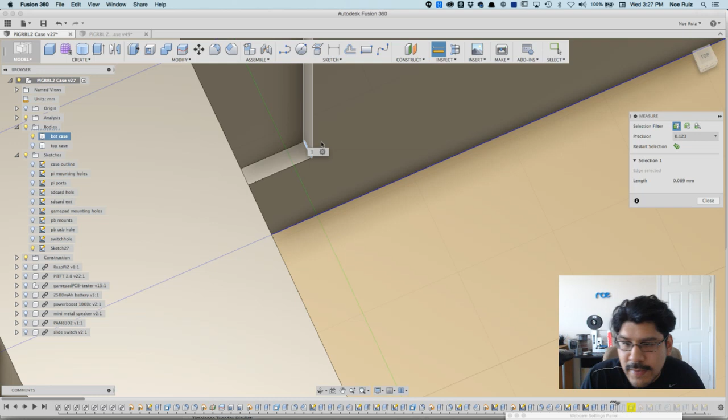I could probably take a look at this and find out how far do I need to push it back. Oh man, that is crazy. 0.089, so that's not much at all, but it's an amount I need to be aware of. Maybe I can just push it back enough where it's not so flush, if that makes sense.

Let me see, let me go back into that sketch. Sometimes this happens where you double click on a sketch and the viewport doesn't look exactly where it should be, but that's fine, we can just get to it again.

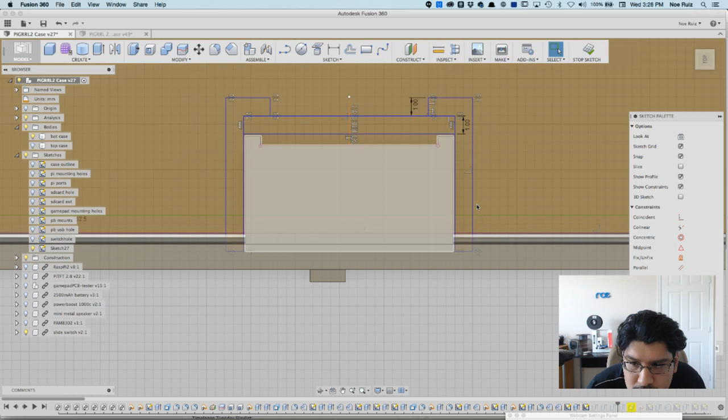Probably just move. Let's go ahead and hide this. I want to add a sketch dimension here so that if I do move this guy, if I do move this sort of whole area, it'll retain. It'll be constrained to 1 millimeter.

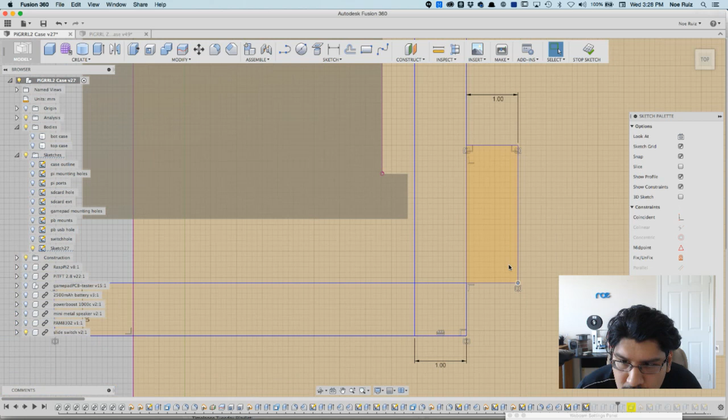So for example, if I push this back by like 2 notches here, I think a couple things got messed up. Yep, some things got messed up.

So you can see I sort of have freedom to move it around a bit. You see things are sort of tying to it. I'm going to hit Command Z because I'm not sure where I'm going. So I think by two units of that grid, hopefully things will be okay.

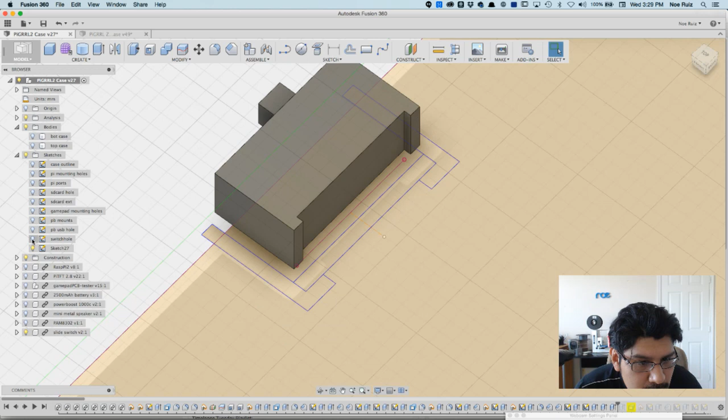All right, a lot of extra work just to make sure everything is kind of fine-tuned, but I think it'll be worth it in the long run. So let's hide that, bring back the bottom case, and that doesn't look bad at all. Looks about right, so that's pretty much what I wanted to do.

There are, of course, some other things I need to do. For example, I want to update the lip area with these clips. If you guys saw last week, I made an update to the enclosure where it had these sort of snap fit pieces in the lip, which looks like it's gone. Oh, because I'm in this specific spot in time.

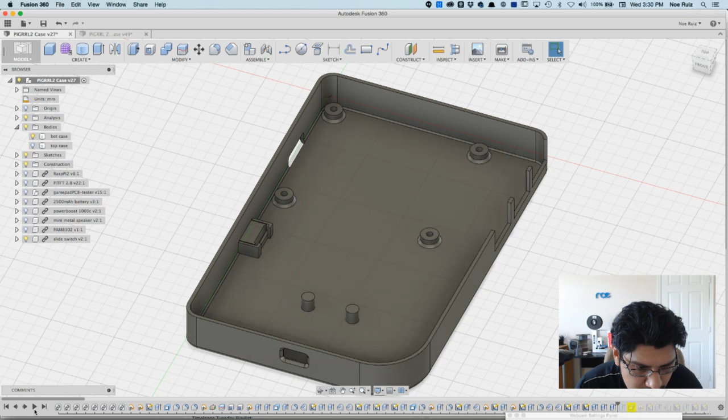So to go back to the front, there's this button over here that says go to the end of the timeline. Some things might happen where it has errors, but we'll get there. Yeah, there's quite a bit of errors, so I need to keep updating it and fine-tuning it here and there. So I at least wanted to show you guys how you can come into your older designs, update some things and clean things up, because as you're building it, your timeline can get out of hand where there's just so many features you're not sure what's what.

So just hopefully a couple of tips here and there, sort of scatterbrained a little bit, but futzing through some of the things - if you condense your timeline and try to make as many edits and features in one sketch as opposed to making 5 sketches, you can really minimize a lot of the headaches. I think by doing this, it'll make the design a little bit more malleable in the future. So that's one thing I try to strive for, but sometimes you just can't do it because you're not sure what you have until you get there.

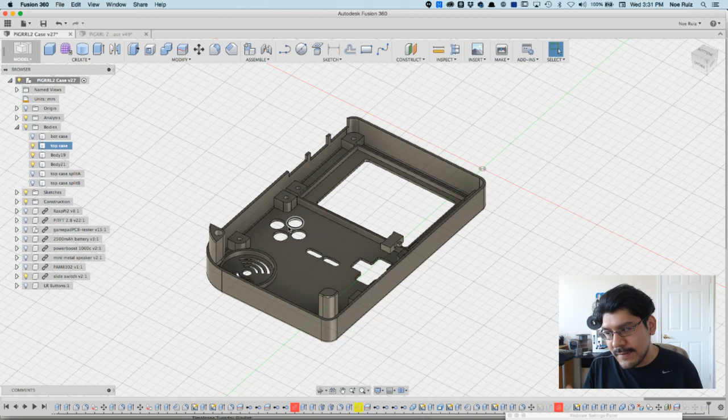I'm going to keep working on this, but I just wanted to share with you guys some of the processes of going back into an older design and trying to fine-tune it even more, because I did learn a couple tricks here on the PiGRRL Zero project.

I spent most of the day actually building this. This is the second unit. I'll probably build out another one and probably do a giveaway or something like that. I'm not sure, but I've gotta focus on making the guide for this thing.

So I took all the photos of it. Maybe I can show you guys real quick some photos. And I apologize, I haven't been looking at the chat because I've been really knee deep in the CAD, as you saw. Phew, it's quite a bit for like a small little thing. PiGRRL Zero. I wonder if my photos are in here or not. I know I'm not showing the thing yet, but alright.

Yeah, so I'll show you here on my screen again, just some photos and stuff of today. There's the final build - I actually need to start naming them. This is one of the final builds, and these aren't color corrected yet, so there's always that last pass of color correcting. This is what the PiGRRL looks like naked, without the 3D printed enclosure in yet. So that's basically what I've been doing today.

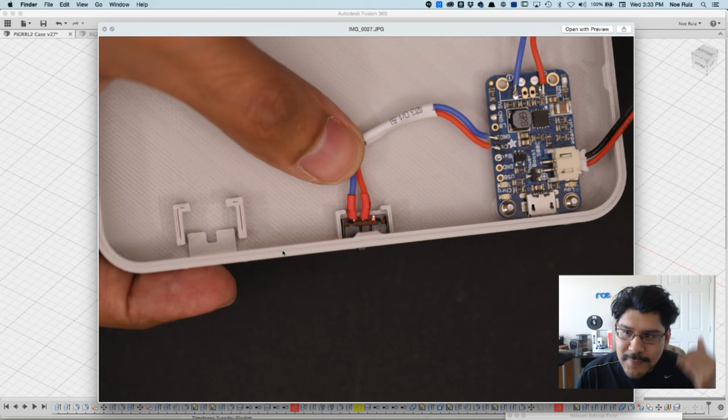Here's some photos of wiring somewhere here. Hey, look at that - that's what we built today. That's one of the steps where it's like insert the thing here. So it's happening, it's getting there.

Just want to take a break from it though, so that I can update PiGRRL 2. Because if you know, the PiGRRL 2 kit is still not in stock. So hopefully by the time it is in stock, maybe I'll have a new 1.1 case update or whatever.

So I think that's it. That's all I wanted to share with you guys. Thank you so much for watching. I would answer some questions and stuff, but I'm not sure if there are any.

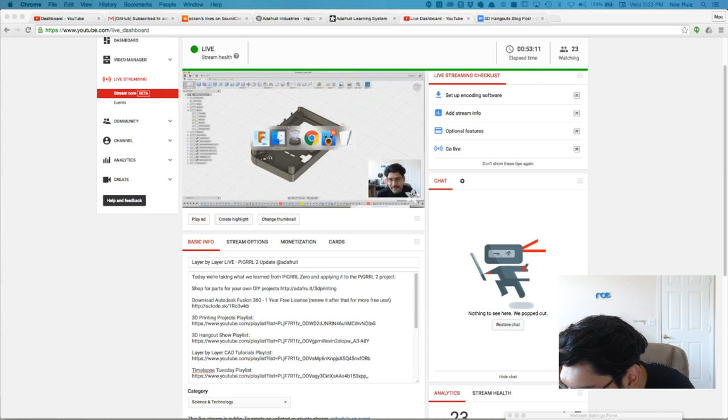Yeah, I think there's a couple in here. Thank you guys for stopping by. I really appreciate you guys coming in here. It's always fun - oh look, we're doing dual things now.